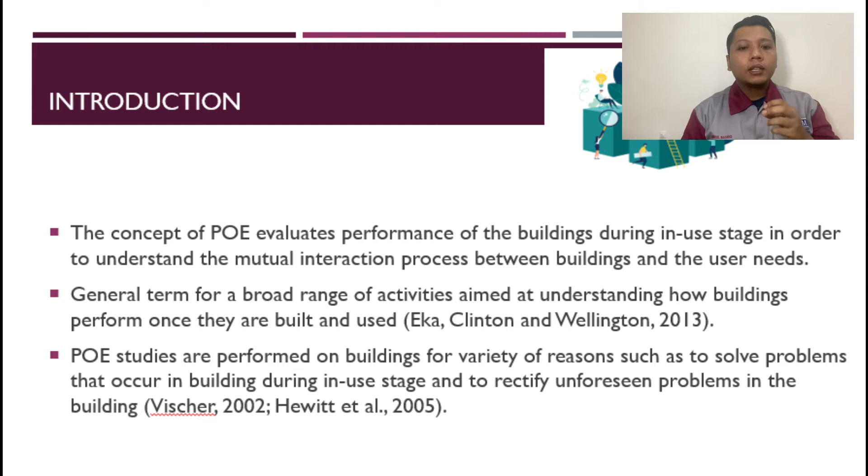POE studies are performed on buildings for a variety of reasons, such as to solve problems that occur in the building during the in-use stage and to rectify unforeseen problems in the building, by Vischer 2002 and Hewitt 2005.

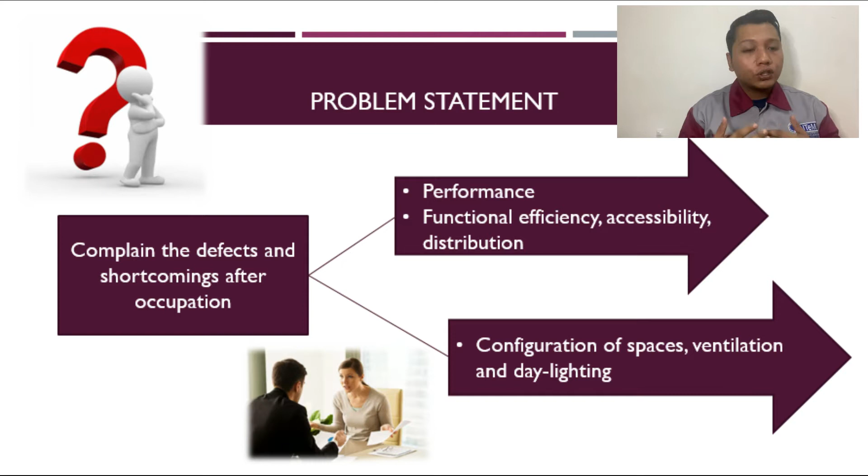Here is the problem statement: receiving complaints of defects and problems or shortcomings after occupation and performance of the building, functional efficiency, accessibility and distribution, and also complaints about configuration of space, ventilation and daylight problems.

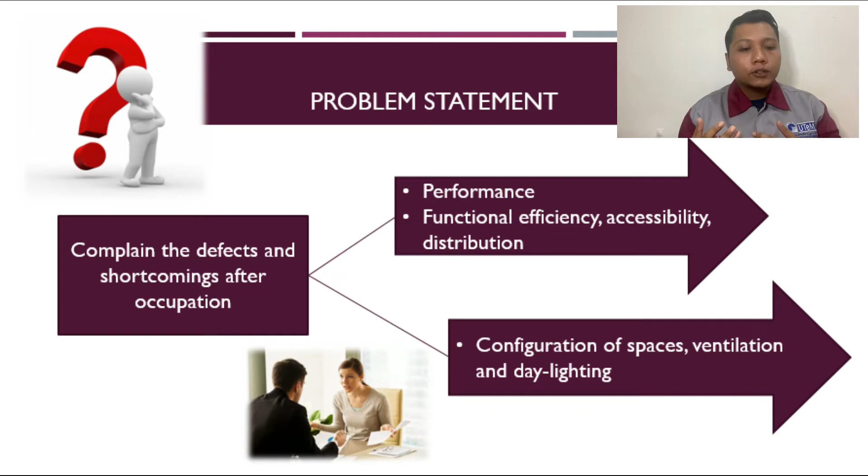For the objectives: first, to study the level of satisfaction of users at FKP building. Second, to analyze the factors that affected the satisfaction of users at FKP building through POE. And last, to propose actions to improve the performance of FKP building during the in-use stage.

The scope of the study is conducted on academic staff, non-academic staff and students at FKP building through a questionnaire survey investigation carried out at FKP building.

For methodology, there are 4 stages in the research: first, determine the scope; second, literature review; third, data collection; and lastly, data analysis.

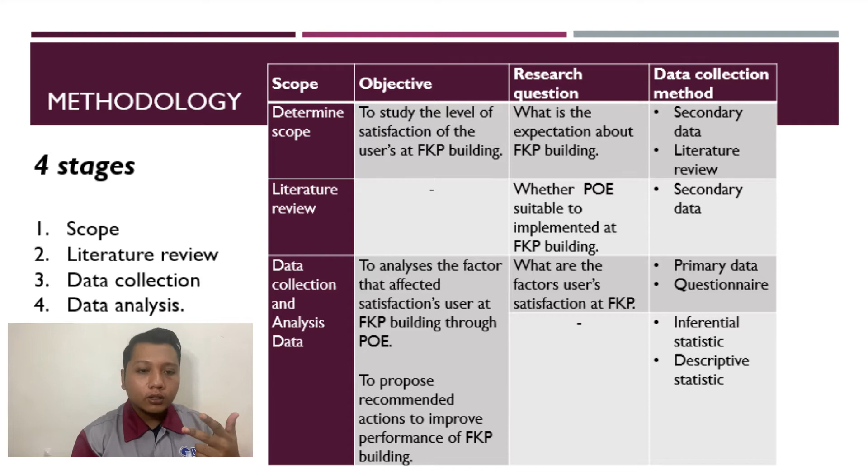Next is data collection and the questionnaire that was created. The questionnaire was distributed to academic staff, non-academic staff and students of FKP, and was divided into 3 sections.

First, about demography. Second, about occupant satisfaction related to functional performance. And the last section is about occupant satisfaction related to indoor environment quality.

After we got the data, we proceed to data analysis using SPSS to generate the data. From SPSS, the data will generate normality analysis, reliability analysis, frequency analysis, average index analysis, correlation analysis by Spearman Rho, and hypothesis analysis.

From that, it shows tables, graphs and charts. After that, we make a conclusion and recommendation, and that's the end of the methodology.

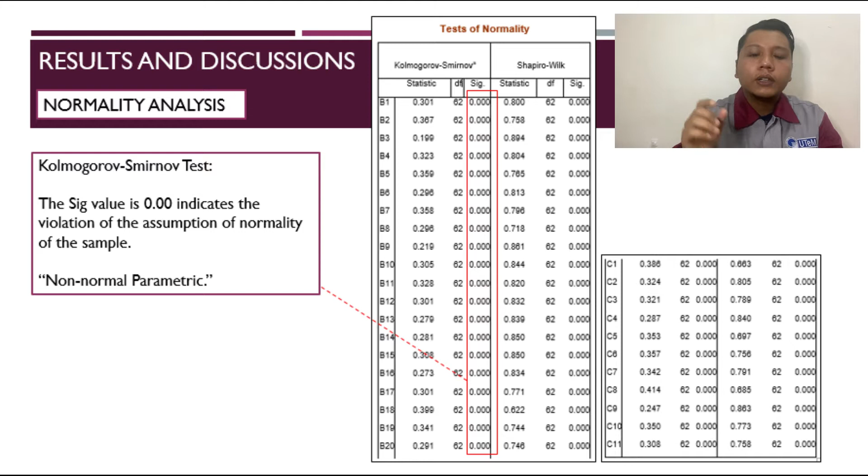Here is the first analysis for result and discussion: normality analysis. The significant value is 0.00, indicating a violation of the assumption of normality of the sample. Because the significant value is less than 0.05, this indicates a non-normal distribution.

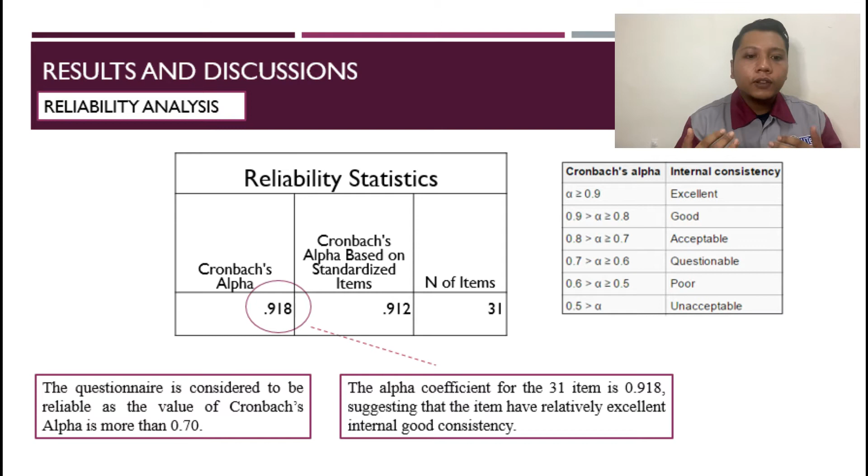Next, reliability analysis. From SPSS, the questionnaire is considered reliable as the value of Cronbach's alpha is more than 0.70. What I got, the alpha coefficient for the 31 items is 0.918, suggesting that the items have relatively excellent internal consistency.

Next, frequency analysis, showing the higher respondent responses from the questionnaire. From data generated with SPSS for section 2, occupant satisfaction related to functional performance, the higher percentage is 66% somewhat satisfied, for item B2 about space provided for individual work, storage and furniture in terms of comfort, flexibility, sufficiency, accessibility, personal control for heating, ventilation, connection points and power supply stability, followed by items B7, B1, B4, B6, B8 and B9.

As we can see, the lower percentage for satisfied functional performance is 33% somewhat satisfied, for item B3 about privacy of workspace. Now we look at satisfaction with overall quality performance in terms of facility.

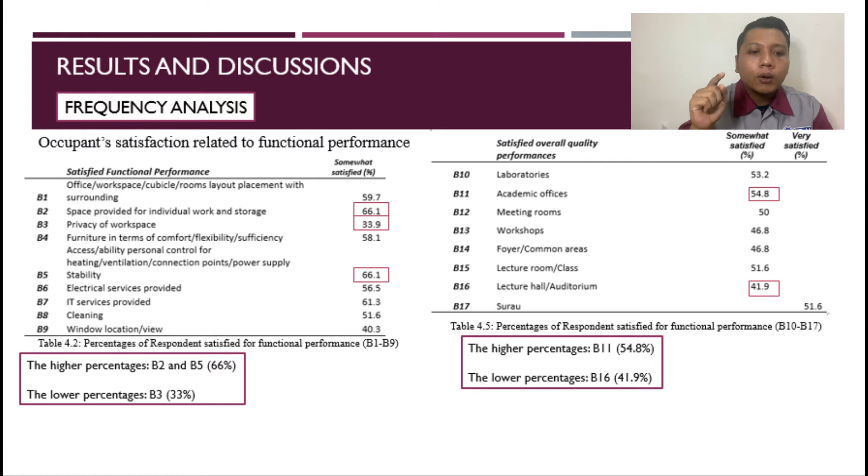Item B11 about the academic office has the higher percentage of satisfaction at 54.8% somewhat satisfied, followed by items B10, B15, B12, B13 and B14. We can see the lower percentage is item B16 about the lecture hall auditorium at 41.9% somewhat satisfied.

Next, section 3, occupant satisfaction related to indoor environment quality. The higher percentage for satisfied is item C1 about indoor air temperature with 69.4% somewhat satisfied, followed by items C5, C2 and C3.

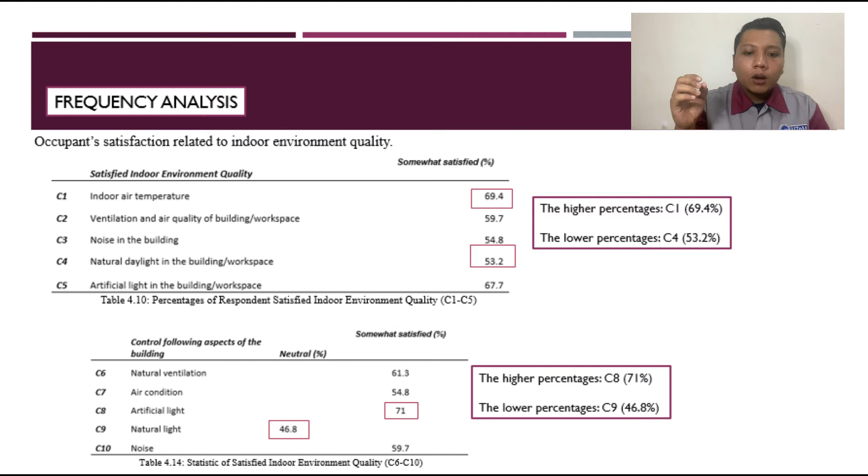We can see the lowest percentage is item C4 about natural daylight in the building or workspace with 53.2% somewhat satisfied. Lastly, for satisfaction controlling aspects of the building, the higher percentage is item C8 about artificial light with 71% somewhat satisfied, followed by items C6, C7 and C10. The lowest percentage is item C9 with 46.8%, only neutral satisfaction with indoor environment quality.

For average index analysis, for satisfied functional performance, cleaning is the first rank in satisfied functional performance of FKP building, with the higher mean score of 4.371. This is possibly because FKP building has cleaning according to the schedule provided, and users have awareness about cleanliness in the building. This is supported by journals from Ibem 2011 and Hassanain 2008.

Building services and infrastructure are an integral part of the built environment and a major influence on educational satisfaction and quality of life of occupants. They include water supply, washroom and water closet, laundry, information technology and electrical services. According to Hassanain 2008 and Sanni-Anibire and Hassanain, these facilities should be properly designed, installed, maintained and managed.

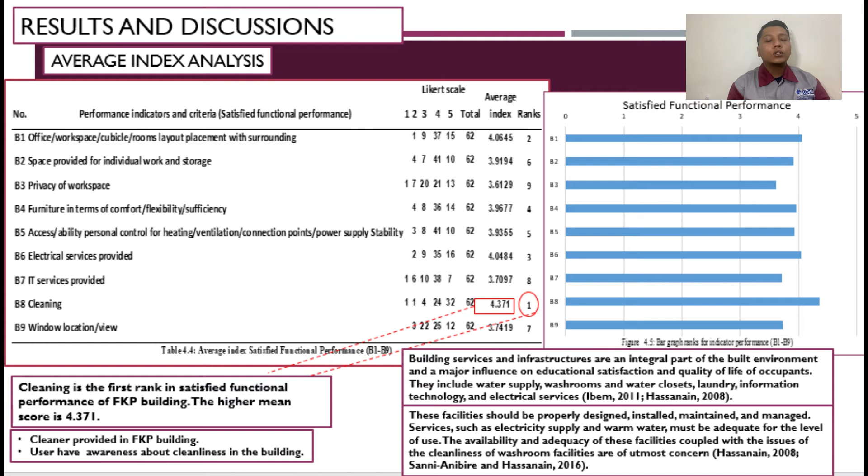Services such as electricity supply and warm water must be adequate for the level of use. The availability and adequacy of these facilities, coupled with the cleanliness of washroom facilities, are of utmost concern. For satisfaction with overall quality performance, the Surau is the best facility, and the majority of respondents agree with their level of satisfaction.

Surau has the highest mean score at 4.0806. This includes the quality of all architecture attributes such as the design and configuration of space, building location relative to other facilities in the campus, and landscape architecture and general aesthetic appearance.

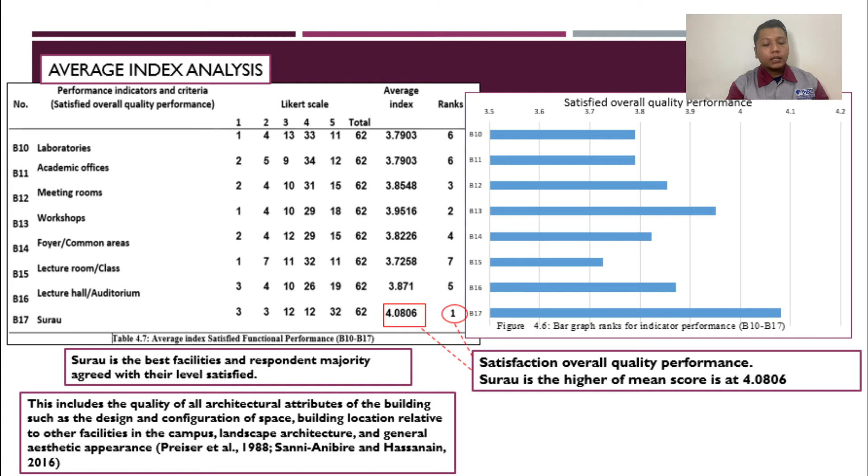According to Preiser 1988, Sanni-Anibire and Hassanain 2016, for satisfaction related to indoor environment quality, the artificial light factor in the building or workspace has the higher mean score at 4.1129. Lighting systems used in the building should comply with indoor lighting requirements to avoid a decrease in performance when it's too dim or too bright.

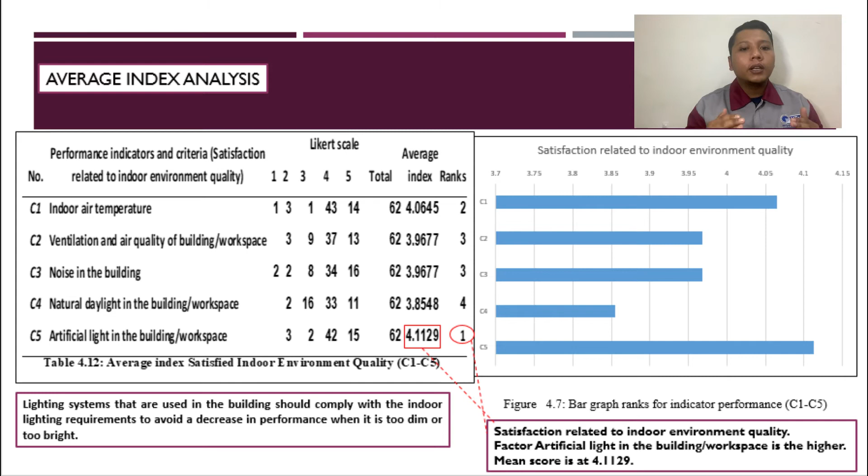For satisfying control of aspects of the building related to indoor environment, artificial light is the higher factor with mean score at 3.8387. If lighting in the building is used according to POE, this may save as much energy as possible, and as a result may improve organization productivity. This according to Gossauer and Wagner 2007.

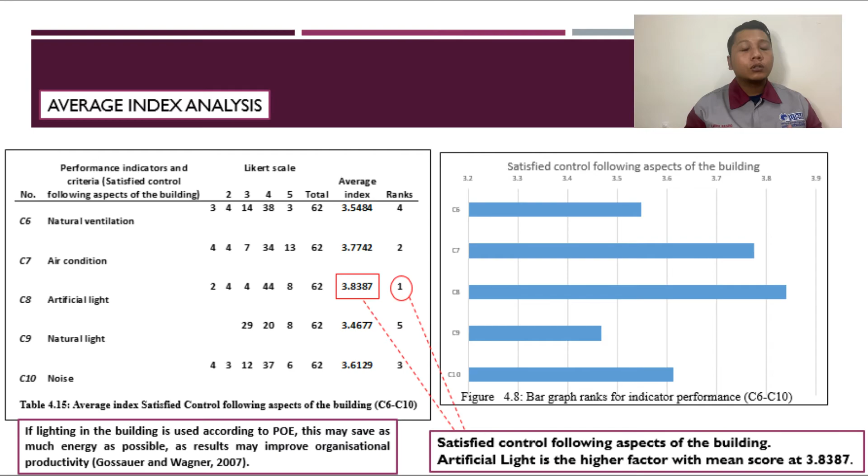For result and discussion about hypothesis analysis: for hypothesis 1, the relationship between satisfaction related to functional performance and level of productivity. There was a medium positive relationship between two variables, B8 and B19. Correlation coefficient value R equal to 0.376, N equal to 62, and P more than 0.001. Item B8 is cleaning and B19 is level of satisfaction in the building or facilities affecting productivity.

Another finding is there was a weak positive relationship between other variables, B1, B2, B3, B4, B5, B6, B7, B9 and B19. The correlation coefficient values are equal to 0.1 to 0.29, with N equal to 62, P more than 0.001. So from hypothesis 1, H0 is accepted: there is correlation between the level of satisfaction related to functional performance and level of productivity.

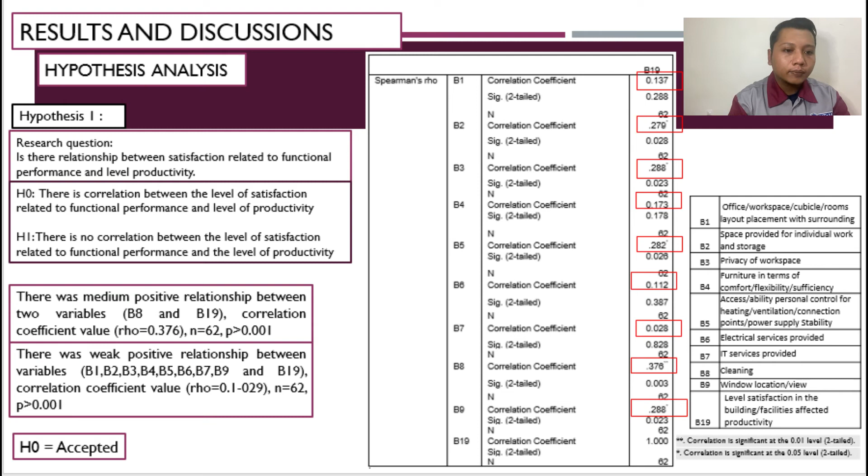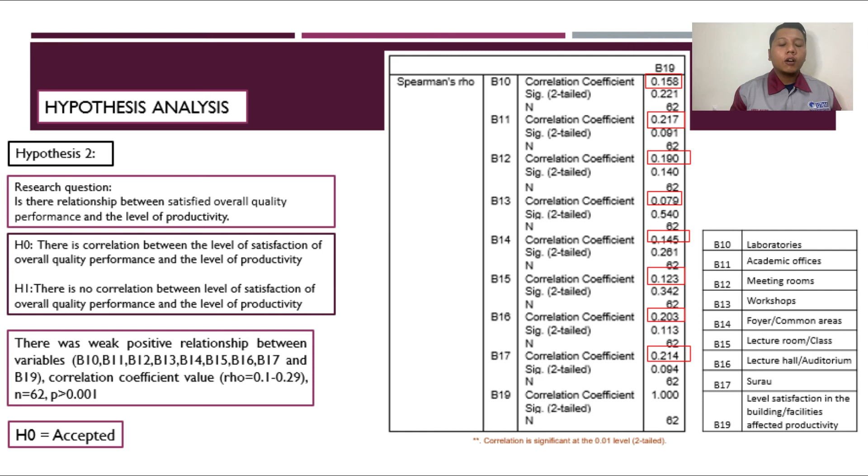For hypothesis 2, the relationship between satisfied overall quality performance and the level of productivity. There was a weak positive relationship between variables B10, B11, B12, B13, B14, B15, B16, B17 and B19. This correlation coefficient value ranges 0.1 to 0.29 with N equal to 62 and value of P more than 0.001. For hypothesis 2, we still accept there is a correlation between the level of satisfaction of overall quality performance and the level of productivity.

Lastly, for hypothesis 3, the relationship between satisfaction related to indoor environment quality and the level of productivity. We have three relationships: strong, medium and weak. There was a strong positive relationship between two variables, C2 and C11. Correlation coefficient value 0.528, with N equal to 62 and value of P more than 0.001. Item C2 is ventilation and air quality of building or workspace, and item C11 is level of satisfaction of overall indoor environment quality affecting productivity.

For medium positive relationship, there was a medium positive relationship between two variables C1 and C11. Correlation coefficient value equal to 0.385 with N equal to 62, P value more than 0.01, where item C1 is indoor air temperature and item C11 is level of satisfaction of overall indoor environment quality affecting productivity. Lastly, there was a weak positive relationship between variables C3, C4, C5 and C11, with correlation coefficient values ranging 0.1 to 0.29, N value 62, and P more than 0.01.

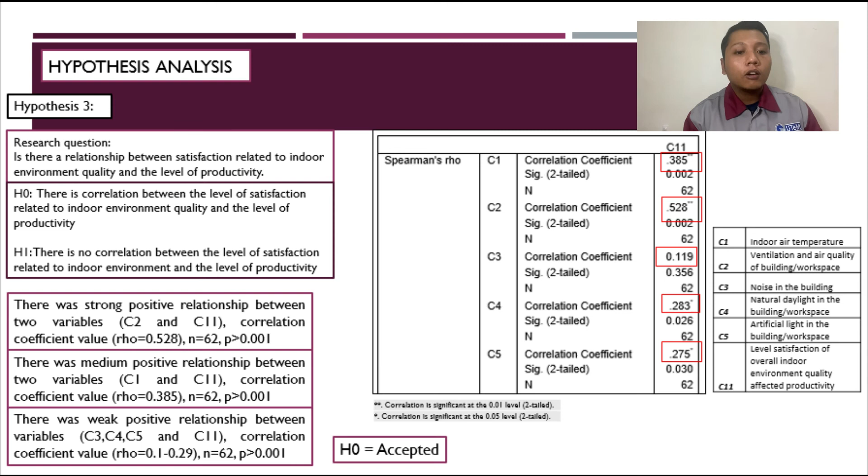This is about privacy of workspace. So the action we can take: the staff office needs to be redesigned, providing partitions between workstations as staff are not satisfied with their privacy. Second, to improve privacy in workstations, increase the wall height of partitions. Third, rearrange the position of furniture in class or lecture rooms. And lastly, minimize the capacity of participants at certain times.

This related to privacy and interaction could be viewed as a very important issue for designers. Privacy can be seen as a person-to-person, person-to-group, group-to-person and group-to-group social unit relationship. This citation is by Altman 1975.

The second action we can improve is control of aspects for the building in natural light. First, provide daylighting integrated with electric lighting control in several areas, for example, provision of atrium and curtain glass walls. Second, allocate larger and higher window openings to improve daylight penetration. And lastly, provide view space facing the outdoor environment to perceive natural daylight.

So for natural lighting to penetrate more successfully into the building, designers should evolve more options when designing or altering an existing building. This according to Gossauer and Wagner 2007.

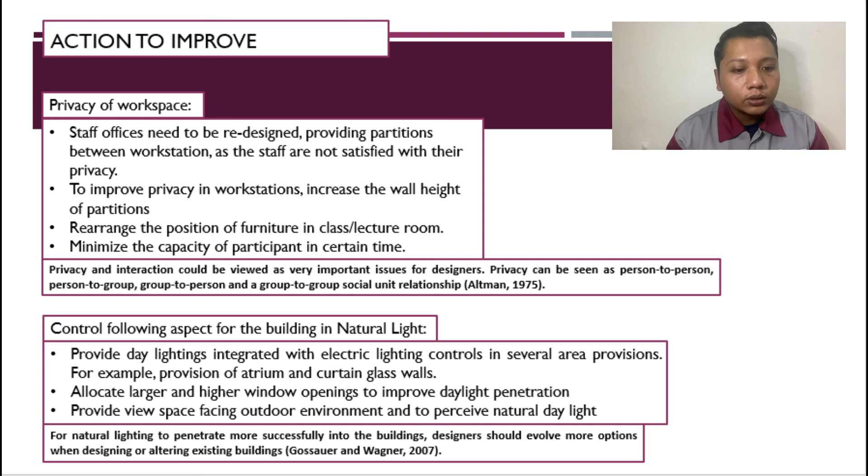As a conclusion, for objective 1, to study the level of satisfaction of the user at FKP building, we achieve the objective by analysis of the percentage of satisfaction. For objective 2, to analyze the factors that affect the satisfaction of users at FKP building through POE, we can see this by ranking the factors of satisfaction. And for objective 3, we can still achieve this by proposing actions to improve performance of FKP building during in-use stage, regarding privacy in workspace and control of aspects for the building in natural light.

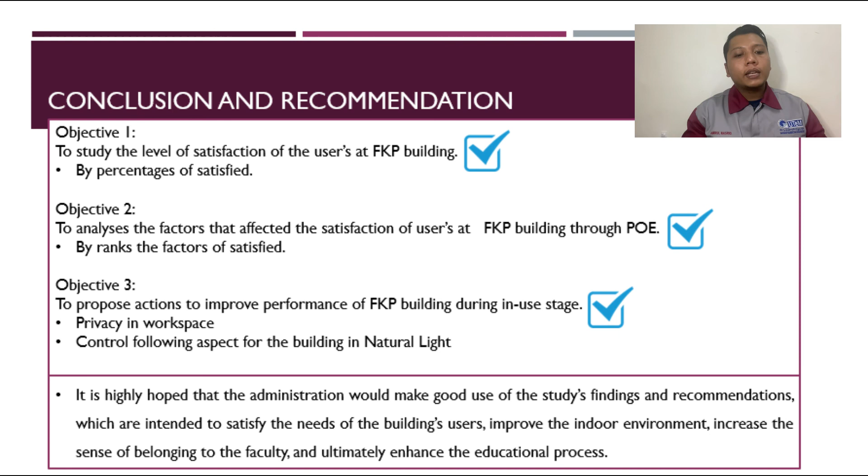As a recommendation, it is highlighted that we hope the administration will make good use of the study's findings and recommendations, which are intended to satisfy the needs of the building users, improve the indoor environment, and increase the sense of belonging to the faculty, and ultimately enhance the educational process. Thank you.